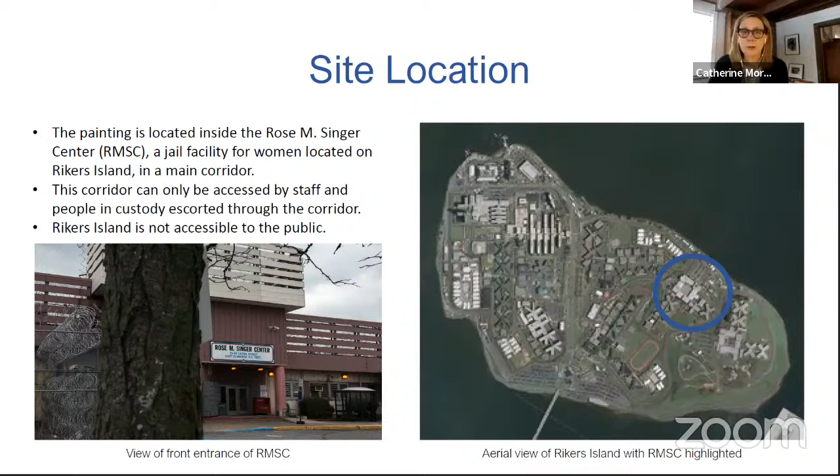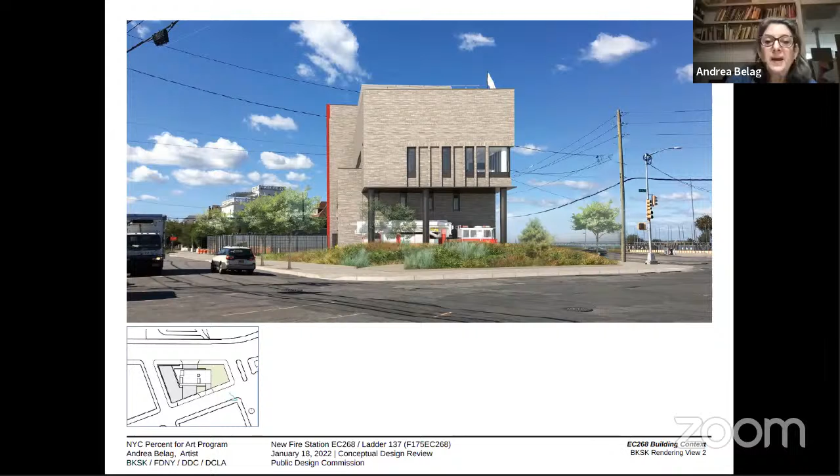This is the new fantastic fire station that will be built, on the side of 116th Street. And the landscaped area is where the artwork will be positioned. Sorry, I'm a little clunky with this. I'm going to show you some work that was completed in my studio during this process.

Like many New Yorkers, Far Rockaway was my introduction to the ocean and beach as a child. When I returned as an adult in 2015, I was struck by the exquisite light, which gave me a feeling of well-being. Little did I know I was on the same street where I had spent time long ago. The attraction was so strong that I ended up moving into one of the original bungalows on Beach 25th Street, and it is now my part-time residence and the inspiration for my work.

The painting in Waves is inspired by my walks on the beach in Far Rockaway. I use color, light, and the illusion of space and movement to interpret the movement of water. The ocean is a compelling feature in Far Rockaway, a community by the sea. Additionally, I want to include images of some of the history and community life on the peninsula. Therefore, I have merged black and white photographs into the painting.

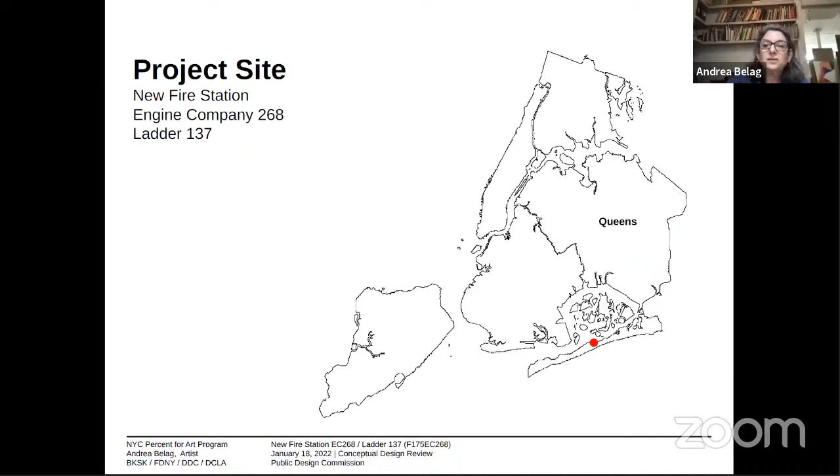Project site is halfway on the peninsula. I'm trying to make this smaller, it's not working. Okay, the project site is halfway on the peninsula. I just did something bad. There we go. This is the site, and it divides the retail and commercial area from the residential neighborhood.

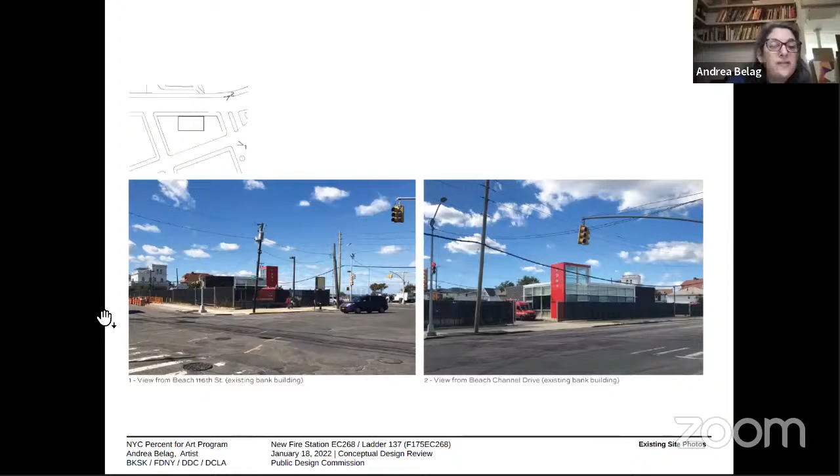And it is in line with the 9/11 Tribute Park. This was the original fire station that was damaged in Sandy. This is the existing site, Beach Channel Drive, 116th Street, and I think it's being used as a teaching facility for the fire department.

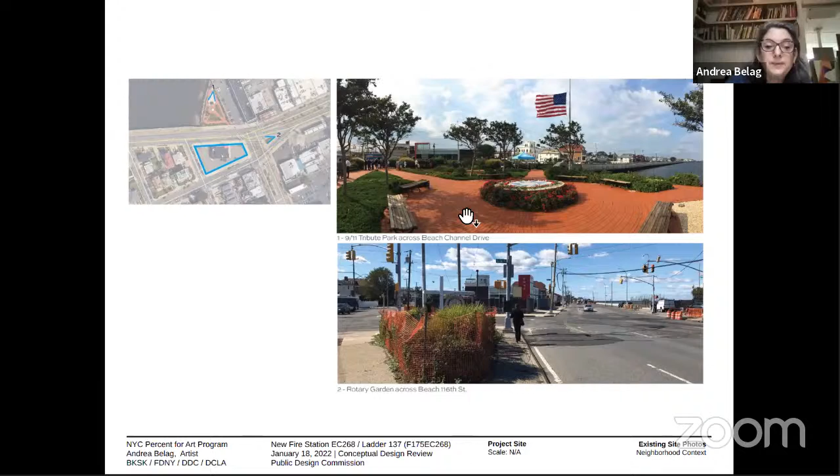And you can see the site for the fire station, the Rotary Garden, and 9/11 tribute lined up. Again, here is the artwork location. It's in the southeast corner lot of the new fire station.

I've taken an oil painting completed in my studio and augmented the dimensions in Photoshop. In select areas, I've blended black and white photographs into the painting.

Early photograph of the Far Rockaway Boardwalk, quahog clamshells that were used by native population, fishing in Jamaica Bay, NASA photograph of Superstorm Sandy, local street flooding, Black Surfers Association paddle out honoring George Floyd, and finally the badge of Engine Company 268, Ladder Company 137. First, the glass will be digitally printed with the photos.

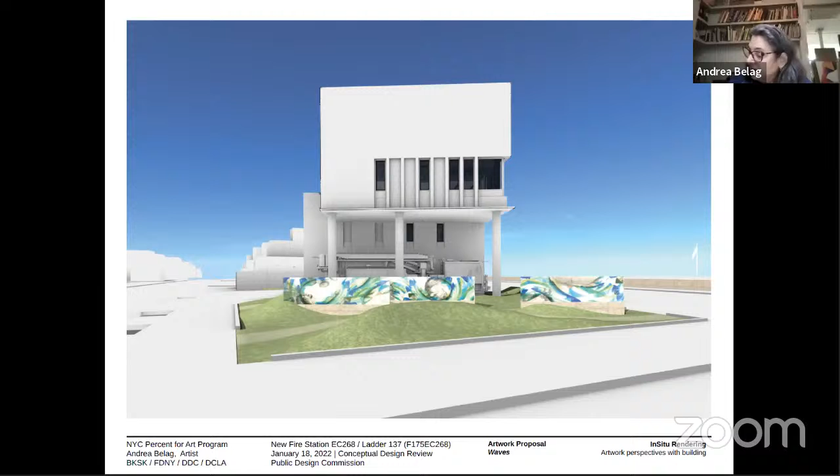Viridian, permanent green, ultramarine blue, manganese blue, cerulean blue, iridescent bronze, gamboge, dianthus pink, and titanium white are the source colors. I hope the artwork will enhance the presence of the fire department, the fire station, EC 268, and Ladder Company 137 as a place of civic importance.

These are the details. The first panel in glass measures approximately 4 feet high and 16 feet long, with a legend in Garamond Regular Pro, and the bottom of it will be 18 inches from the bottom of the glass. The first image is a 1903 photograph of Far Rockaway's boardwalk, which is the 2nd largest in the country. And here you have clamshells, which Native Americans came from different areas, as well as the local population, and used

as a major source of food. And then taken these beautiful shells, which have a purple indentation, and carved them into beads and small objects.

This is the second panel. These are fishers in Jamaica Bay. This is the Gil Hodges Memorial Bridge, which was built in 1937 and connects Far Rockaway to the mainland, Brooklyn, and beyond. And this is Superstorm Sandy, from a NASA photograph.

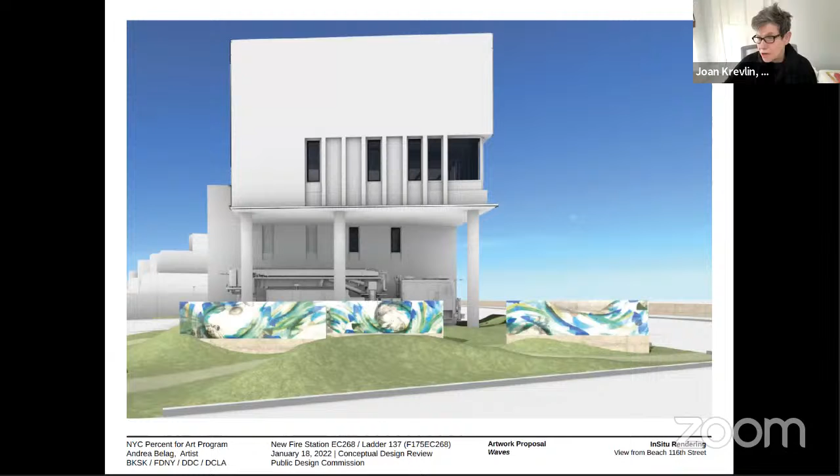And the seating are low pebble benches. They were in the architectural presentation, but they sit close to the ground and are kind of flat, pebble-shaped pieces. They don't have a lot of articulation to them, and they don't have backs or much line to them, which I think will make them not distracting in any way, but part of the reading of the landscape.

I'm going to chime in here. Deborah, did you want to say? Go ahead, Signe, I can follow you. Okay, well Joan, I think you mentioned this right off the bat, but the choice of plant material right now and the intent, as I hear it described, are completely not in sync. The plant material that is on the palette right now gets to be at least 30 inches, if not taller.

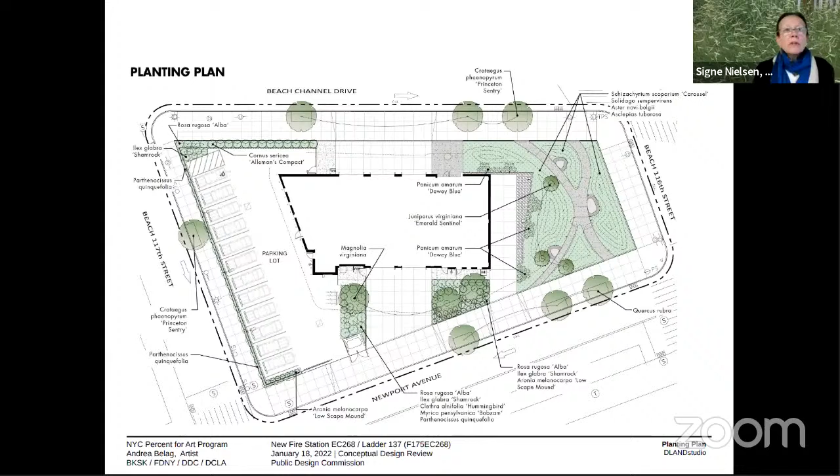And so that has to get reconceived. But I'm worried that if it remains a palette that recalls the dunes, these grasses will have to get cut down every year. And as such, the presence of the base and the relationship of the base to the piece is going to change over the course of the year. And I think that needs to be thought through.

I just have to say that it's somewhat gratuitous to say that the benches are placed in the shade of trees when those two conifers are about as skinny as you can get. So if you do really want shade, those should not be junipers.

And then the only other thing I'd say is, Manuel stated this at the beginning, is that the text—albeit I think a general question about whether this level of didactic intervention is appropriate—it is only 2 feet off the ground. It seems incredibly small, and it's not that close to the path. So I'm not really sure, not to mention the fact that under the current plant palette, it'll be totally obscured by August. If you look at panel 2, there's no way somebody on the path could read that.

I appreciate that panel 1, the text, if it is the way I understand it, is on the right side of the east-facing panels. Then you could probably read it on 1 and 3, but you definitely can't read it on 2, especially if the font is the size it is. So I really think that has to get rethought, and the planting.

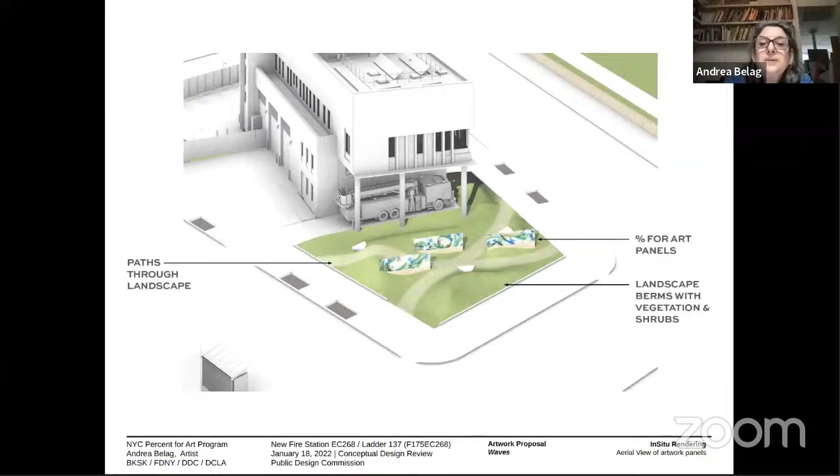Joan, do you want to talk to them? Sure. Yeah, we did a whole series of studies with Andrea and DLANDstudio about how to site them. In part because the piece started as a single piece, we thought that the fact that they are running all parallel to each other, that they have a relationship to the geometry of the building, and can be read almost sequentially as you move through it—in the series of studies we did, this was the one we felt was strongest.

The paths weren't there first—the idea of the paths were there. We then worked with Andrea to site the pieces and then worked the paths back through them so that they had good visibility and you could see them from different perspectives as you moved through it. So it was trying to both be responsive to the building geometry, to the movement through that site, and to be able to read them both individually.

And if you're on the sidewalk, you kind of see them as a collection of pieces that could almost be reassembled in a way. I think curving it would make it even more complicated relative to the building, and also probably prohibitively costly. I think it would be an interesting exercise if we had lots of budget, which I know Andrea is really hard up against.

We also spent a lot of time looking at the proportion of them with Andrea, and wanted to have them read relatively horizontally. So the 4 foot by 16 foot height kind of gave a sense of movement as you move through it, and they felt kind of linear as opposed to too tall and like stoppages in a way—they felt too static when they were taller.

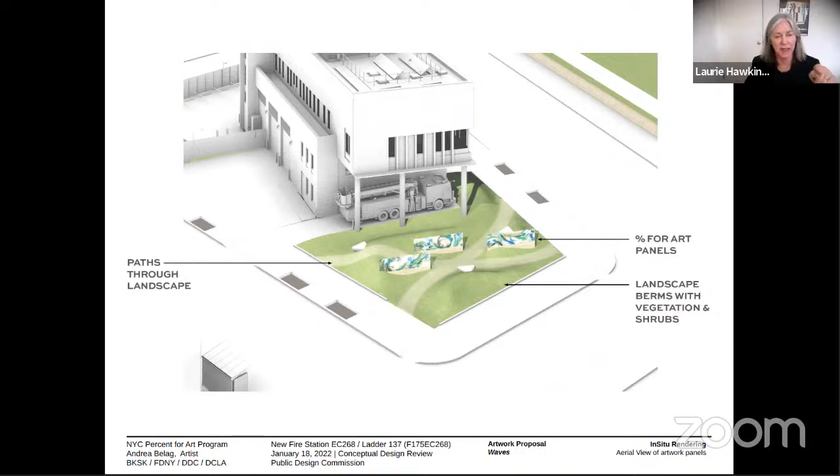So we did quite a lot of study about proportion and how you come upon them as you move through the site. We could certainly continue to study those paths—I don't think they have to be fixed in stone yet. So maybe you get closer to the first one as you're coming in the front, but the idea is that you weave through them and engage with and encounter them. I had just one follow-up question, which was when I was looking at the section—if we could go back to that.

The section looks, where is the concrete in this section? Andrea, go to the last page, because this is an earlier study about height, and this is more of a structural drawing right here. So this is a more accurate representation, and we're looking to see whether we can taper the concrete towards the top so it's not quite a shelf. So if you see on the right, the glass panels will sit in the concrete almost like a glass railing in a shoe.

We did a series of studies that had a metal frame around them. We're trying to keep metal off the site as much as we can. We certainly didn't want to frame the artwork. And so this as a strategy feels like the most inobtrusive strategy, but I don't think we have sized or proportioned that footing correctly yet.

I think from my perspective, it's too chunky at the top. And I'm hoping that we can taper it so that as it reaches the panel, it just doesn't have such a hard edge. And we're looking at that right now with our structural engineers.

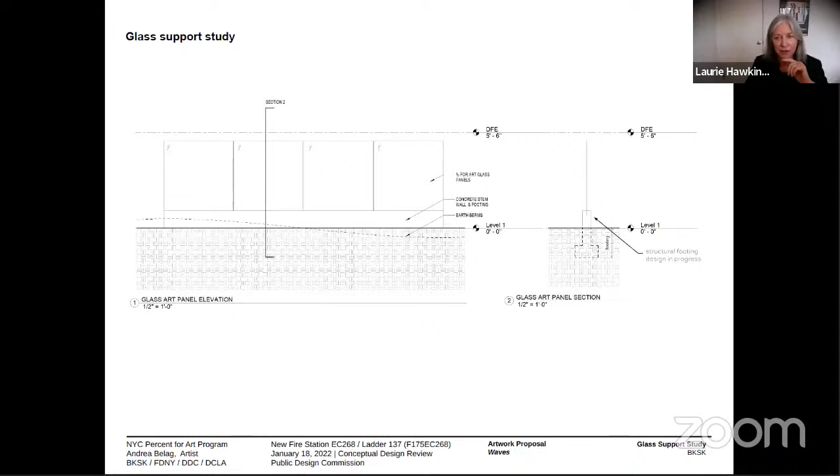And so you'll see that at our next presentation. You're going to be looking at, you won't be looking at architectural concrete. This is a footing, so that's just something else, I know you know that. Yes, but we can control the color to a certain extent, which we've done before. It is architecture, it is a footing, but we can kind of have a certain amount of control in terms of the quality of it and how we do it.

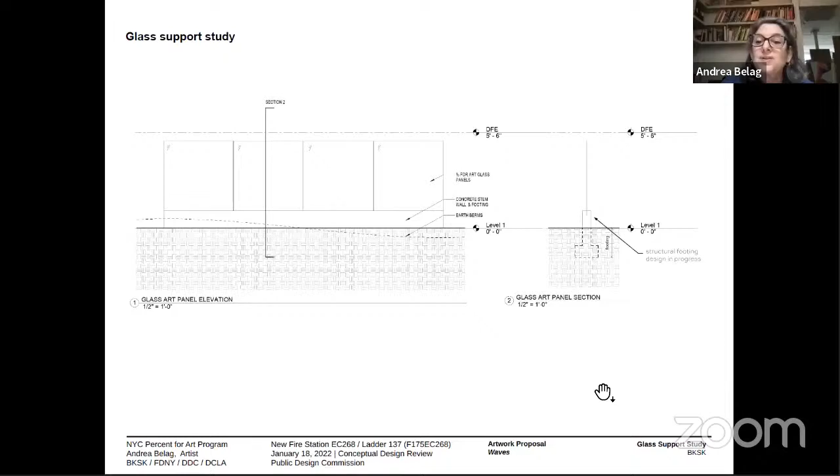And then the reason, one final question, the reason for the three pieces being all the same length? That was my choice. It's not to prioritize, it was sort of a timeline in the way I conceived it. The first panel being the earliest history of Native Americans, and then the beginning of the boardwalk, and then the third one being Superstorm Sandy.

I don't know who's doing what over here. I don't have the controls anymore.

And more towards contemporary events, like the Black Surfers Association. So it was vaguely a timeline, and it just seemed to make sense to me.

Andrea, I'm controlling. Is there a specific slide you want to go to? No, I was just answering. I'm very happy for you to take control.

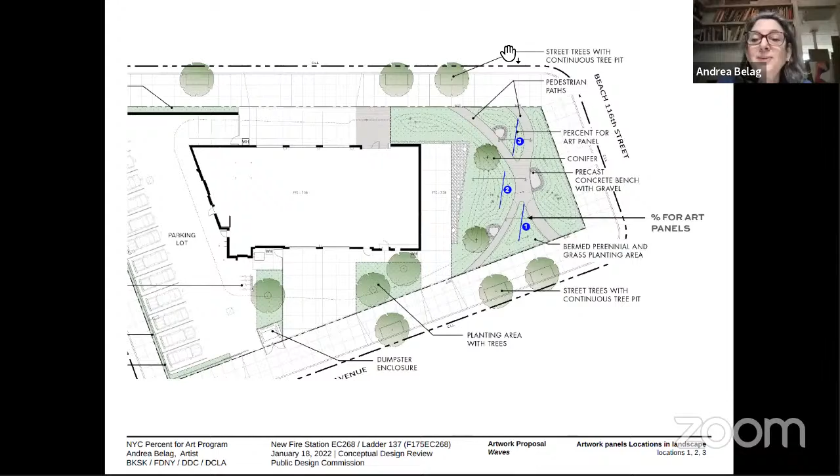And there's only one other thing, and I have to defer to Keri on this, but at today's meeting, unfortunately, we are missing our two artists members, and I know that really the conversation that comes out of today will help guide you in the next month before you come back for a conceptual vote. And so I wonder, Keri, is there a way that we can get input from our artist members before this is sort of finalized?

So we did informally review the project with Kenseth Armstead, Commissioner Armstead, and the response we got from Kenseth was whether or not the artists had considered increasing the height of the glass panels to 8 foot so that the artwork is more immersive.

I do not think we showed this with Mary, but we can definitely seek a little more feedback for the team before they move forward too far.

I can answer that it would just be way too unwieldy and somewhat dangerous to have something 8 feet, especially if we're going to have it as a horizontal. It just, it would look fabulous, but it's just not possible.

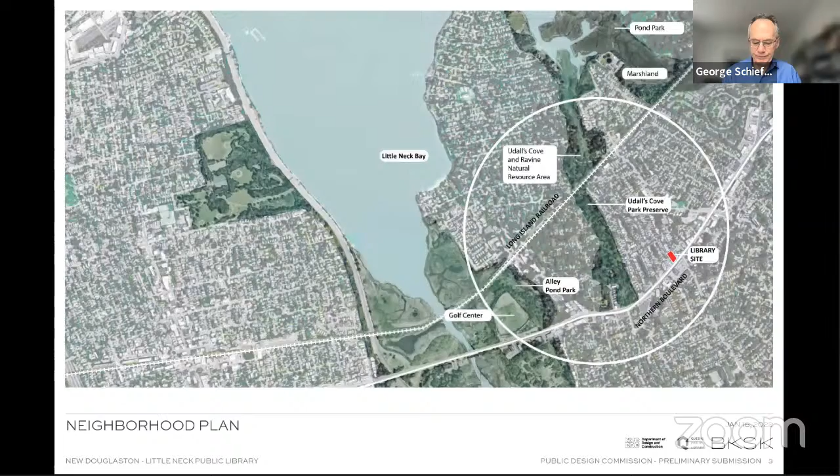So that juxtaposition of Northern Boulevard up against these fingers of greenery is one of the first major themes for our design. In the local context, we're surrounded by kind of strip urbanism, parking lots on a lot of these corners. 249th Street, on the left side of your screen, is a residential street. Northern Boulevard is the very busy thoroughfare I've talked about. What we've tried to do is create a very prominent, obvious, and dynamic presence on this corner.

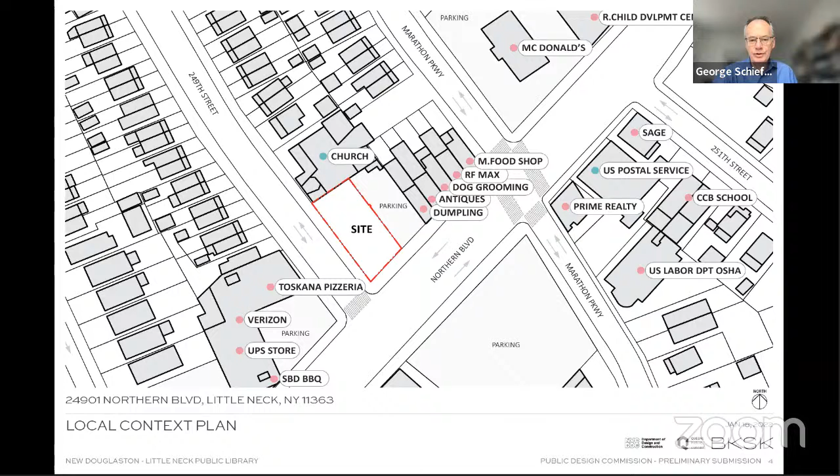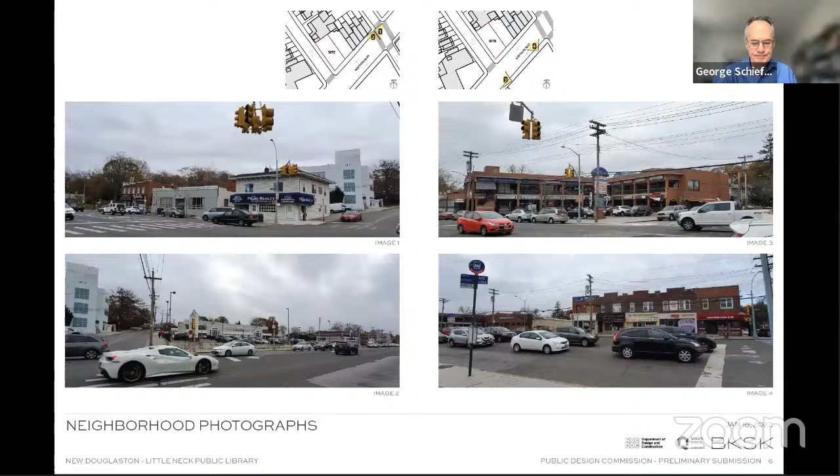The other corners around the site have this kind of strip urbanism I've been talking about, fairly nondescript. The neighborhood extending to the west, on the top left slide, is quiet, residential, tree-lined, very lovely for the most part. A church is our neighbor directly to the west.

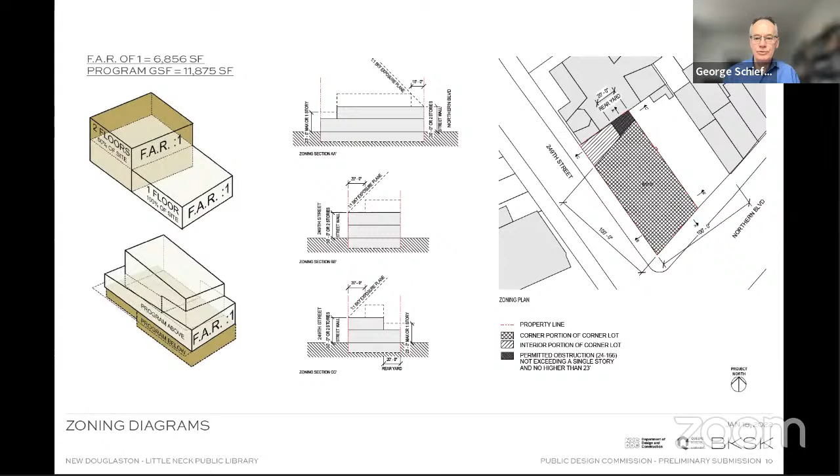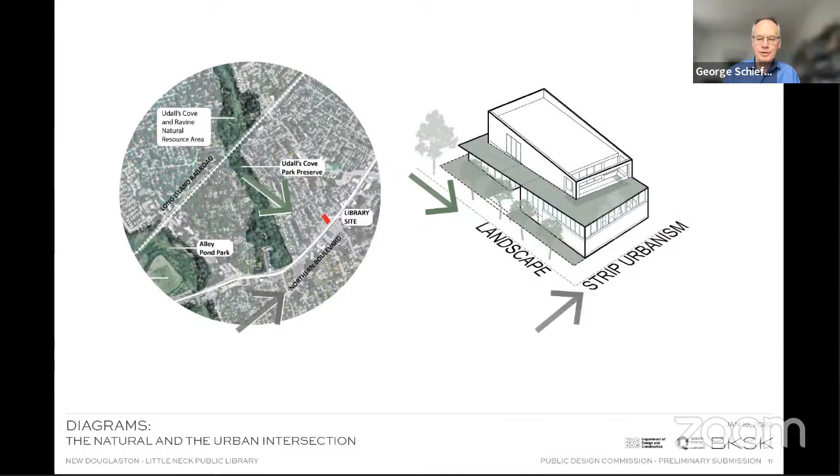So again, that primary idea of bringing greenery to the site juxtaposed to the strip urbanism takes the form of a landscape forecourt, a prominent green roof, and then a garden off of the children's area at the top right of the massing that you see.

So we have a series of slides here where we've done what we showed you previously, and then what we're proposing now. I'm going to skip right to what we're proposing now in each case.

As we look at the site, a thing to keep in mind is that straight up the page is project north. Actual north is about 45 degrees off to the left, so the angled facades on the corner of Northern Boulevard and 249th Street are facing southwest and southeast, and they'll get prominent sun. So a lot of our strategy for the facade on that level is about shading.

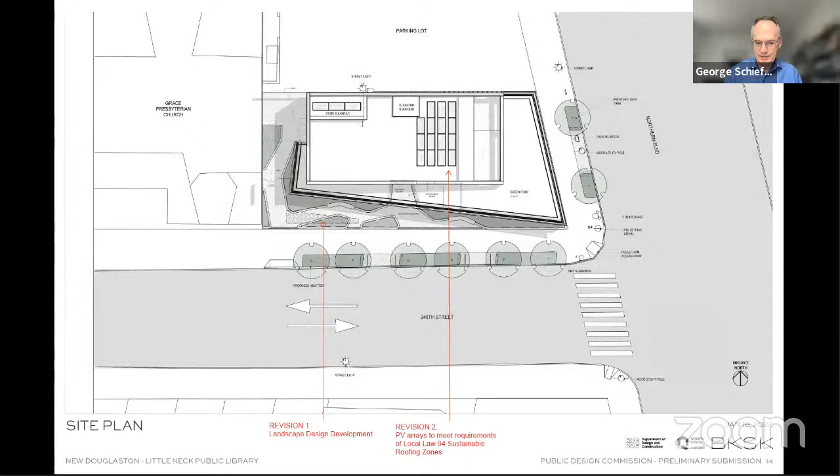On the left-hand side, to the west of our building, is a maintenance area with gated access.

The cellar plan, or lower level plan as I prefer to call it, has as its most important thing to remember: teens and the multi-purpose space have the two light wells that are visible on the exterior and experienced by the library goer as he enters the library. They are shaded in light blue.

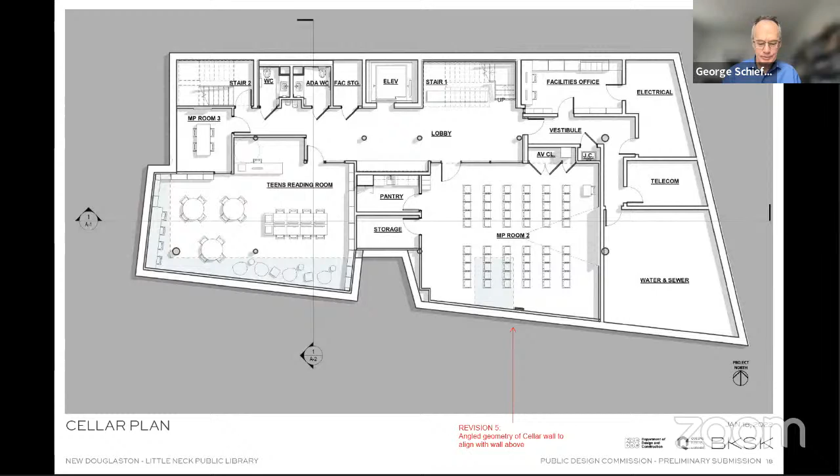The second floor children's area, the children's reading room, occupies the whole second floor and is primarily open with a continuous glass wall to the east, and has its own private garden. It looks out onto that garden, and then beyond that out onto the sloping green roof of the lower wedge. That green roof is also experienced from the windows into the children's area at various strategically placed locations.

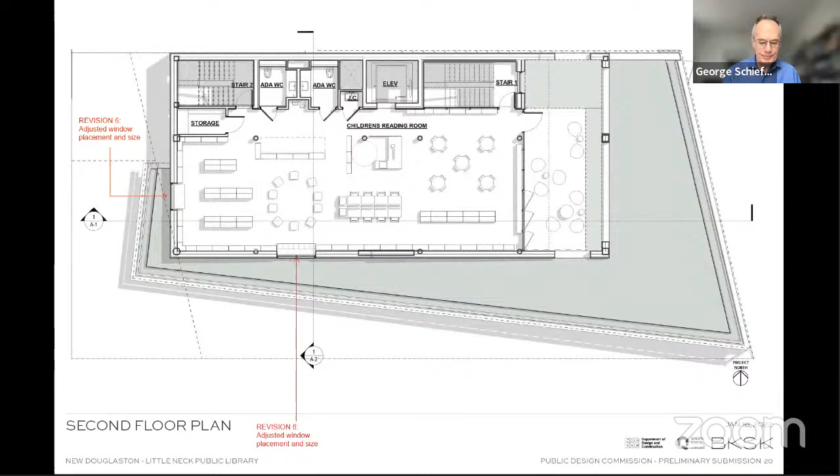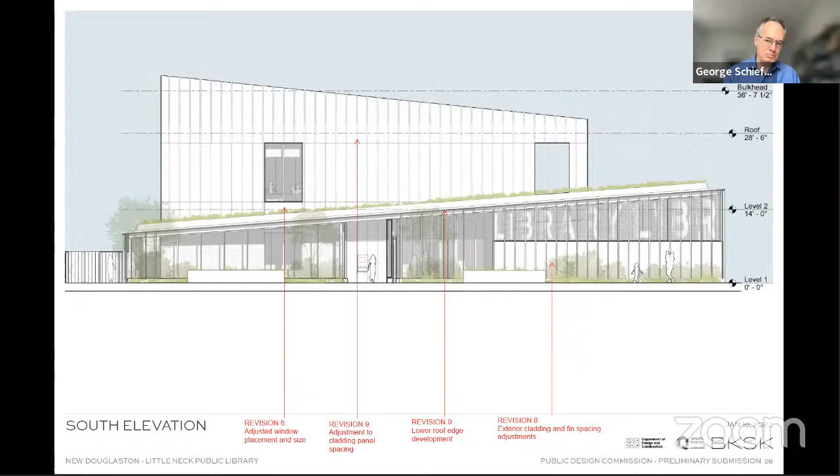The lower wedge is characterized by fairly deep fins and a flat rain screen panel system. The fins are anywhere from 4 to 12 inches, depending on whether they're over the glass or over the surface of the panel. It's also characterized by the big graphic, a fritted pattern slash super graphic that helps with shading and creates a presence on Northern Boulevard. The top wedge is flat rain screen panels with a reveal, morphing into an opening. Those reveals become openings at the parapet level so the building starts to dematerialize a bit at the top.

Again, from the Northern Boulevard side, you see the deep fins on the elevation and the super graphic facing out onto Northern Boulevard, and above that the children's garden in a sheltered and shaded space.

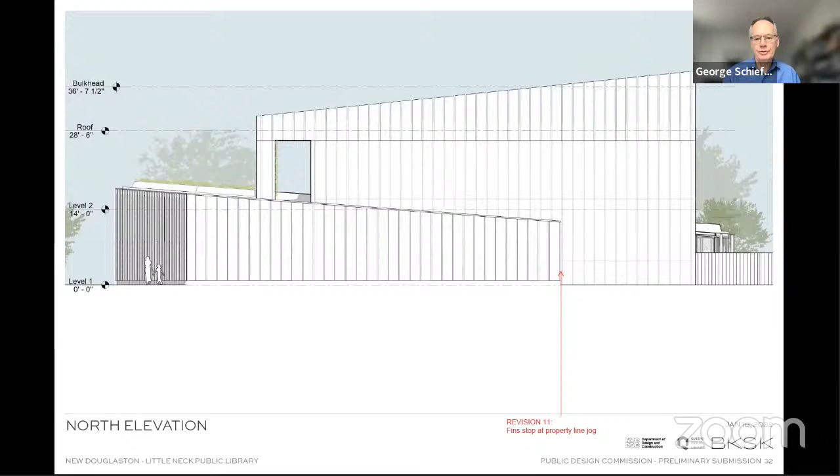We're blessed by a slight jog in the property line, so we can continue our deeper fins around to the backside and contrast them to the flat panel expression of the upper wedge coming down to the ground on this face.

As one walks down from 249th Street from the residential area, one ought to experience the extent of the green roof extending up on the side of the building. You can see the glass transparent expression at the first floor and the more solid expression of the upper floor.

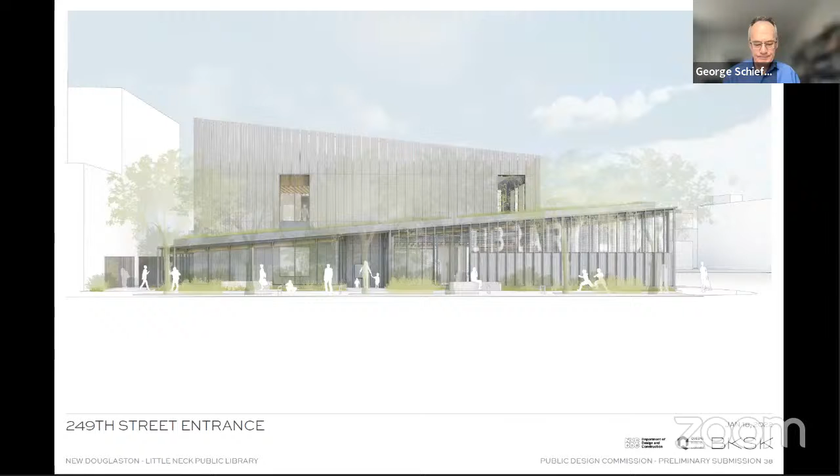View of our building from the residential street, looking back at those light wells, the light well down to teens on the left with artwork in it, not shown in this image.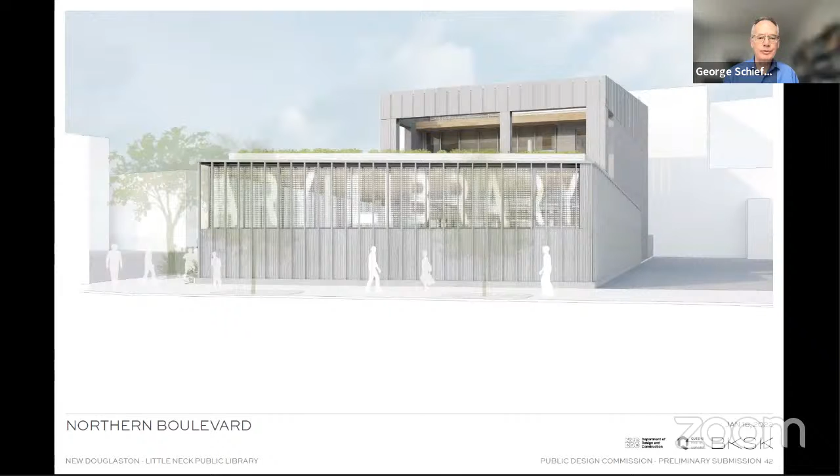And the expression on Northern Boulevard with a large graphic. You can also see very clearly here the wood ceiling emerging out onto the children's garden at the top of the building.

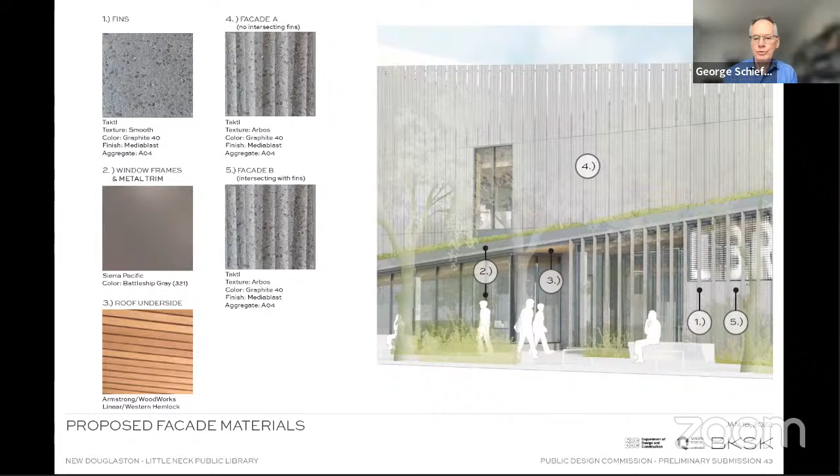Our materials are UHPC, ultra high performance concrete, glass fiber reinforced concrete as a panel, rain screen panel system. In order to be able to use and bid multiple vendors, we rely more on the patterning, spacing of those panels rather than the actual surface texture. We'd like to do both, surface texture and spacing, fins, reveals, and openings between the panels, as well as surface texture. It depends on the actual material vendor we're able to use as to how much surface texture we can get. On the bottom left, the wood I was talking about, within the neutral gray container, provides a kind of counterpoint.

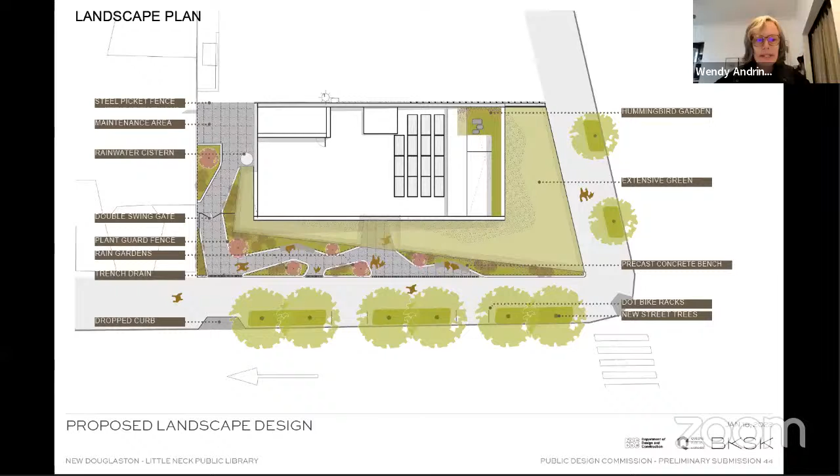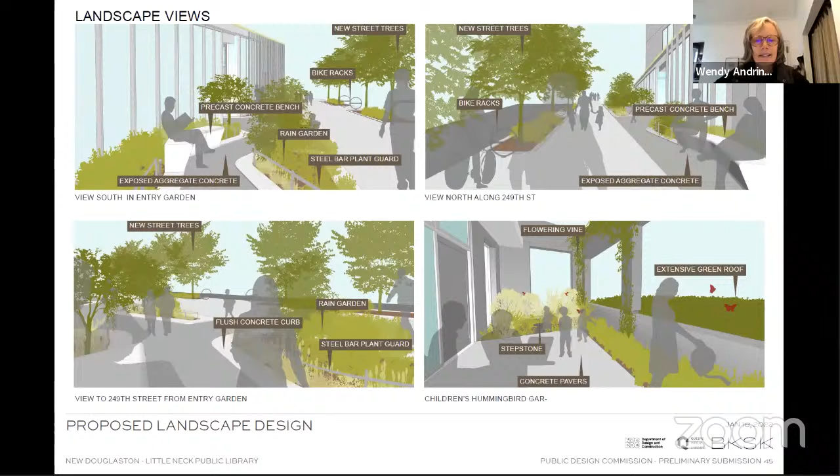And at the bottom right, the views of the children's terrace with the hummingbird garden surrounding it, the climbing vines, and the green roof beyond the parapet. Next slide, please.

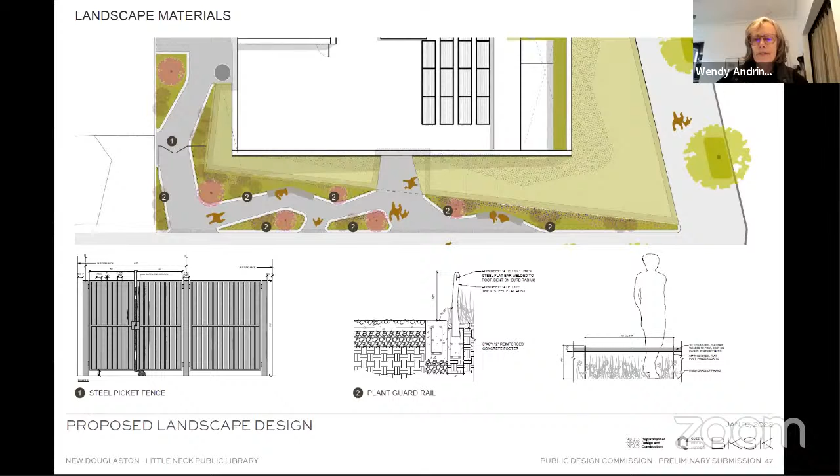There's a fence enclosing the maintenance area and a plant guardrail surrounding the plant beds. The six-foot steel fence matches the color and finish of the architecture, and the 18-inch plant guardrail is made of steel bar that can be bent to the curves of the plant beds. Next slide, please.

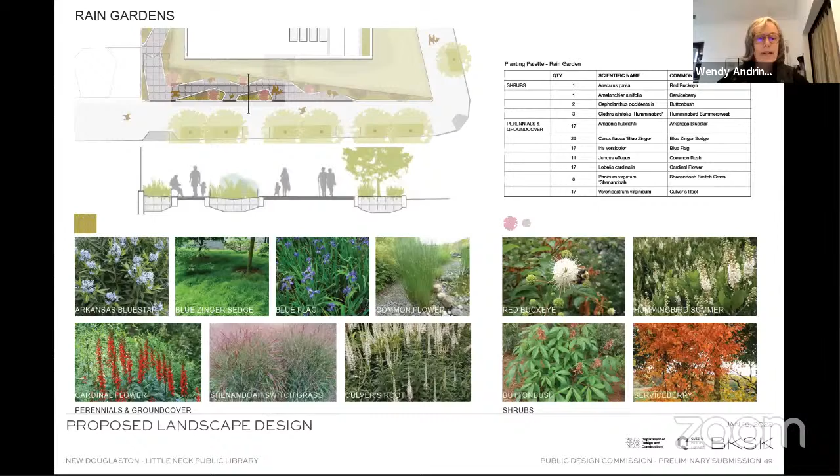The rain gardens, highlighted above in the key plan, use a similar palette to the rest of the planters for continuity, with the addition of grasses and perennials that like wet soils. Next slide, please.

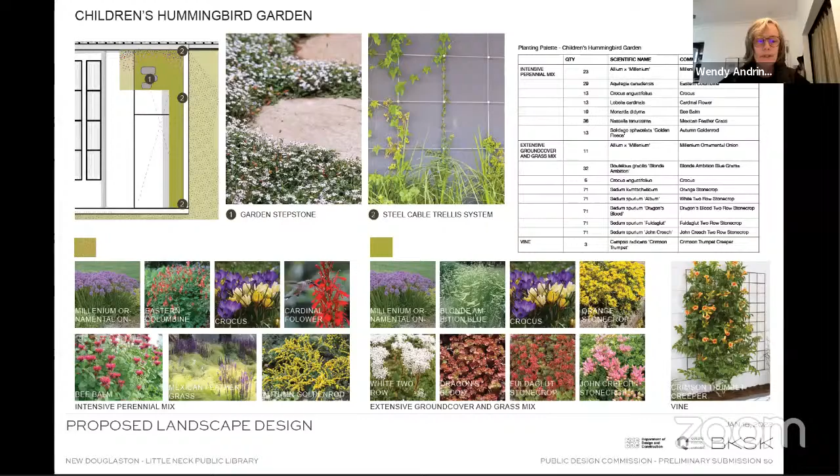On the second floor, the children's hummingbird garden palette at the bottom left is proposed for the area around the garden stepstone, marked number 1 on the plan. These are selected for their hummingbird qualities, habitat qualities, and texture, and the character will be shown as in the feather grass image, with soft textured grass interplanted with perennials. There are stepstones here to invite children into the center of the garden because we want them to touch and interact with the plants. The palette at the bottom right is a ground cover and grass mix for the linear planter, where the trellis is marked number 2, and here the sedum is interplanted with grass mix. We've proposed native trumpet vine for the trellis and spring ephemerals throughout this garden for early spring interest.

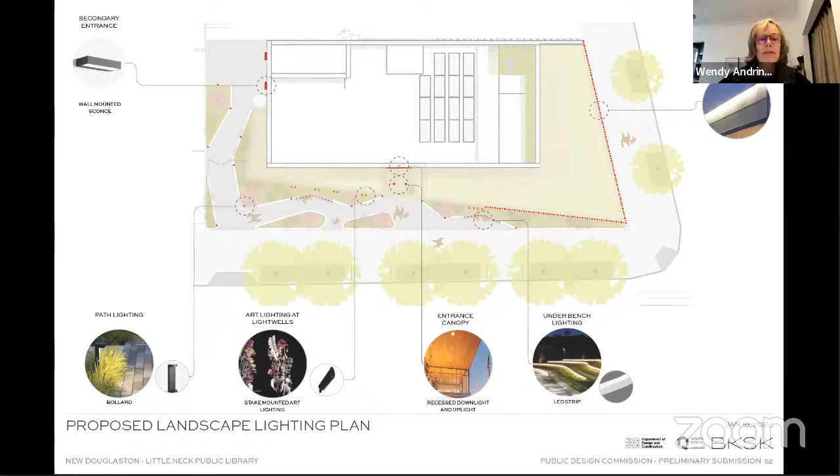The entry vestibule is lit with recessed downlights and an uplight. The artwork, which is seen through the windows into the light wells, is lit from outside with uplights in the planters.

There's lighting integrated with the library signage and wall-mounted lighting at the secondary entrances. At the second level, there's lighting beneath the canopy that overhangs part of the children's terrace, and an accent strip light in the parapet to highlight the planters.

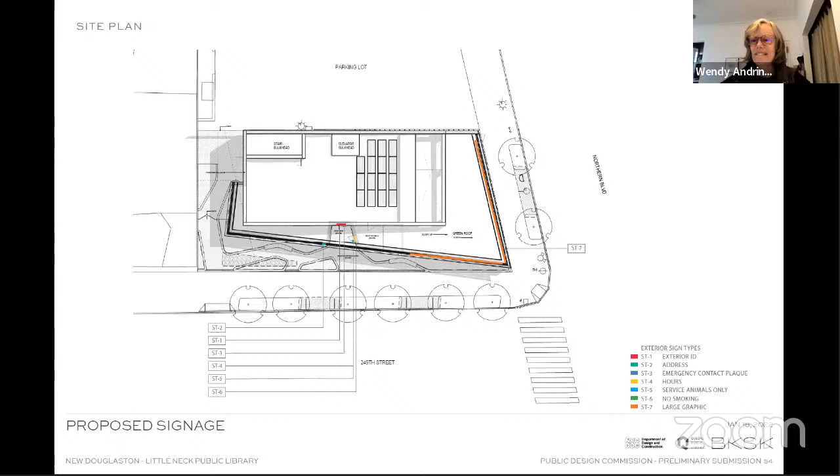George, are you able to unmute yet? There we go, finally. I've been hitting the mute button for a while.

What we're showing here on the right-hand side at the elevation facing Northern Boulevard and 249th Street at the corner is an orange graphic indicating that we hope to be able to light the large graphic in a very subtle way with a kind of hidden light source. It depends a little on zoning interpretation and what we'll be allowed to do.

What the large graphic we hope will make clear is that the announcement of the library will be on a large scale, and the signage required to indicate the presence of the library can be a little more discreet, having a sort of happy home in the recess outside the vestibule.

Signage right at the entrance as the library goer comes into the landscape plaza and directly faces into the building.

The super graphic, as I've indicated, announces the presence of the library in a kind of car-centric environment.

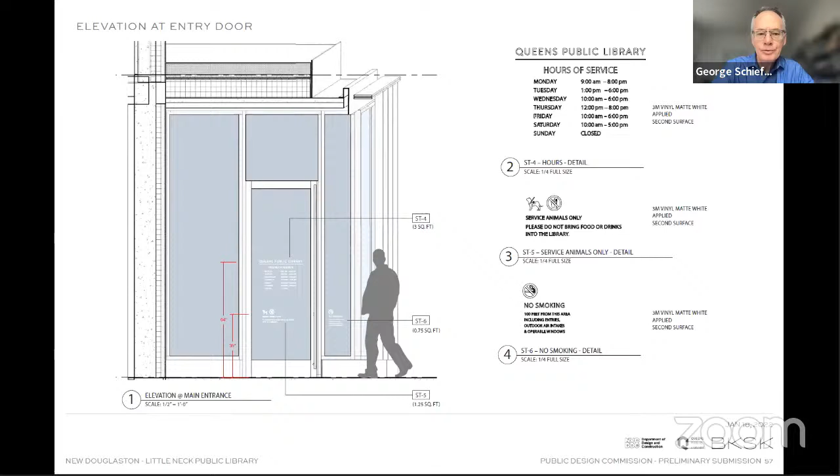And then the signage right at the entry doorway, all the required signage and sizes, to be very visible for the library goer as they come into the building.

Font, size, and scale of each of the items for the signage.

I'm hoping Misha's on at this point because this is his turn. I hope we made clear where Misha's artwork was, to the left and right of the entrance in the two light wells that extend down to the teens and multi-purpose space. Go ahead, Misha.

All right, well, thanks so much. My name's Misha Kahn. I'm an artist and designer. I live and work in Brooklyn. Sarah, if you want to just sort of breeze through some past work.

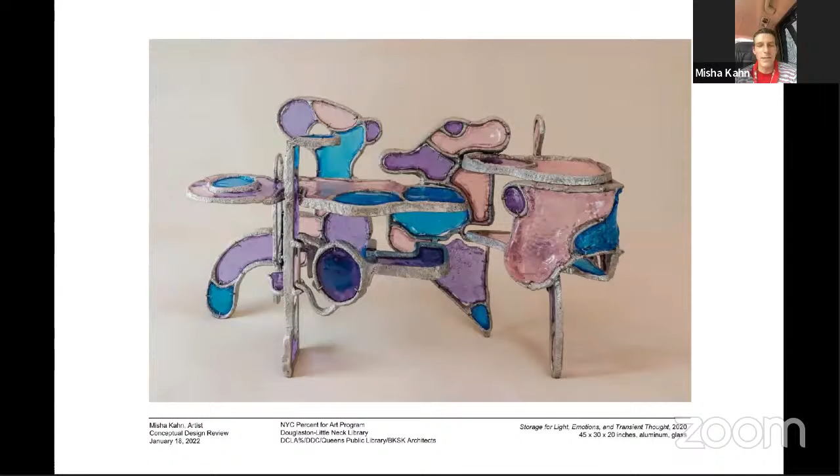A lot of my artwork uses digital fabrication as well as really classic craft techniques, melding these two processes, mostly in an abstract, informal way, but with some lucid, maybe surrealist elements woven in, using a lot of different materials. You're seeing some weaving and pieces in plastic and metal, mixed media and casting. I wanted to bring a lot of this different spirit into this project.

There's all the history and literature that's accumulated over time, research books, but also posters and teen periodicals, all these disparate elements. I was thinking about how to fuse all of those with what the library is doing, which is organizing all of those elements, and putting them together with this really logical structure. So the library is forming this lattice work of logic that is holding these pieces.

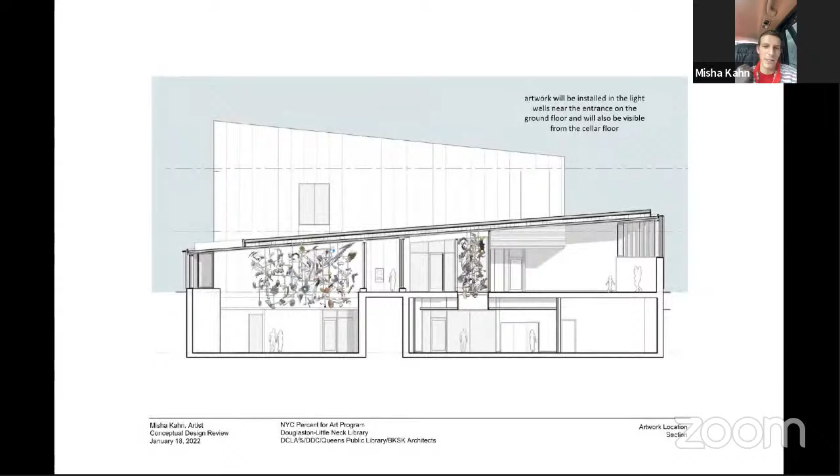The one on the right side forms a more vertical column. As you enter the building, you can walk around all sides of this one—that's the box on the right. This one's more of a 360 feel, and the forms are more helical and swimming.

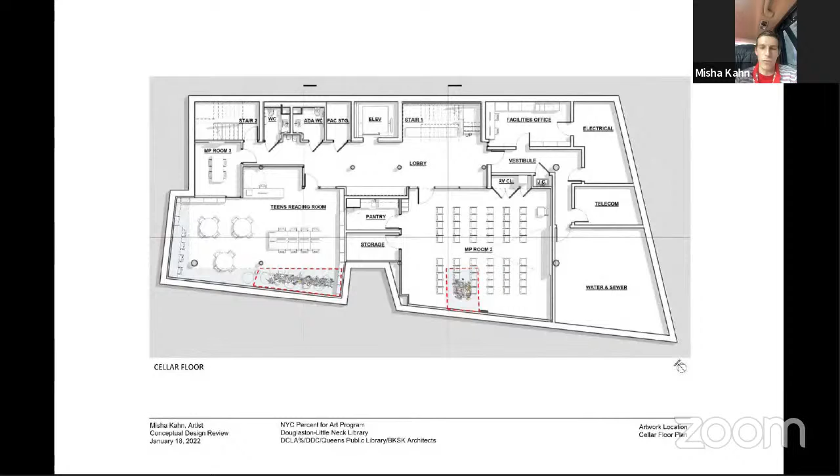Both works extend slightly down into the downstairs space, stopping at around 9 feet. From downstairs, you get the light bouncing through the shapes and see the bottom part of the works extending into the teen area, as well as the area on the right. I think this is a nice way to feel like the work is moving through the whole building.

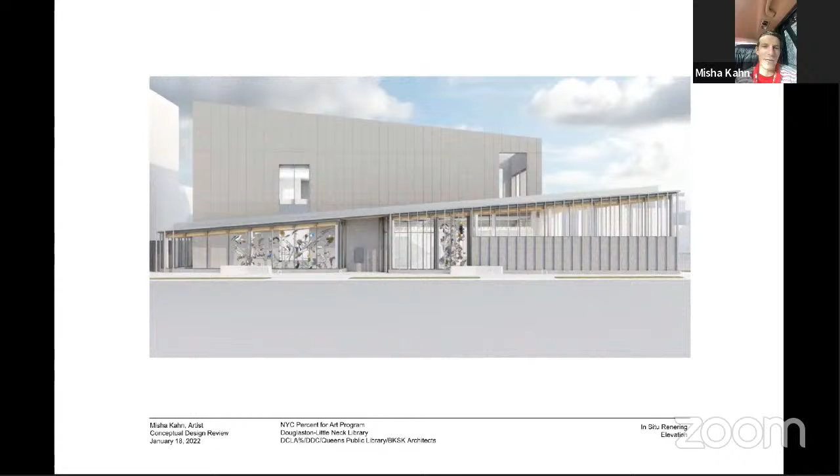Here's a closer rendering of the two pieces, and you can see the way the one on the left is this floating facade, and the one on the right is more tangled and three-dimensional.

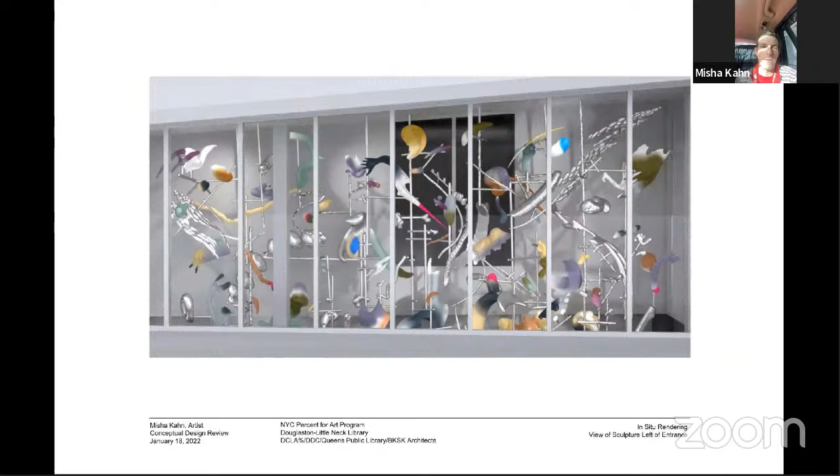Again, this is the one on the left, so you can get a closer look at some of the elements and see the way the forms are playing. What I hope is that this is a visual that people coming to the library can keep discovering new elements every time they return. We've talked about ways this could incorporate with programming—maybe a map, physical or digital, that could direct kids to different points of inspiration or places in the neighborhood or library that these forms reference and come from.

The material I propose using is building the lattice work out of stainless steel. The 3D printed components, made of PLA, would be covered with UV automotive paint so they have a really glossy finish that does well in the sunlight. Then the rigid structure from the stainless steel elements makes those pieces attachable.

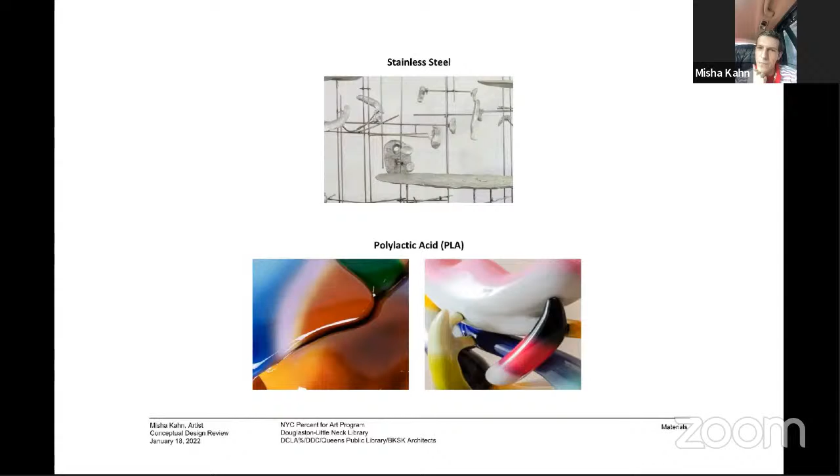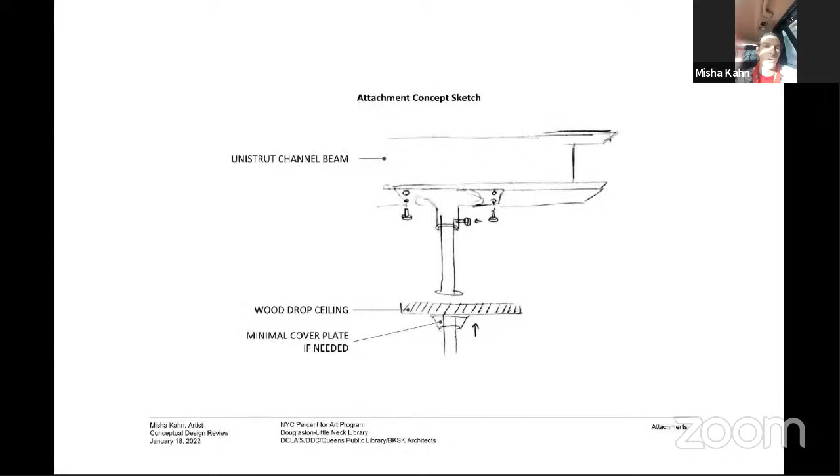A couple of attachment suggestions: go through the drop ceiling and mount some posts into the main beams, so you have a very minimal point where it comes through the wood ceiling detail in the two spaces.

There's obviously the maintenance concern of needing to get in and dust the pieces. They're fairly easy to clean, and we've talked about some ways to get into the space to make sure it's possible to maintain the work.

Thank you for that comprehensive, multidisciplinary presentation. I just hope that the landscape architect appreciates that my screensaver is Bouteloua.

Comments or questions from anyone? Laurie, you must have something. Very funny. Okay, so I guess, well, we have both the building and the artwork, right?

And the landscape, thank you. I'm going to defer to you, but I think the building is very elegant, and the massing, I think I stated before in my comments, beautifully designed. And I had that question about the light, which I thank you for responding to. I had one quick question just looking at the sections.

I'm sure you've thought of this, but the green roof, because you're opening up that double height space to the exterior in that 1.5-story room, George, slopes back. I was just thinking, if it was my situation, I was thinking drainage—drainage alert here. I'm not sure you've thought of that, but maybe you want to address that. And then I had, I don't know if Manuel's going to have—maybe I'll defer to him—any question about the library graphics for the moment?

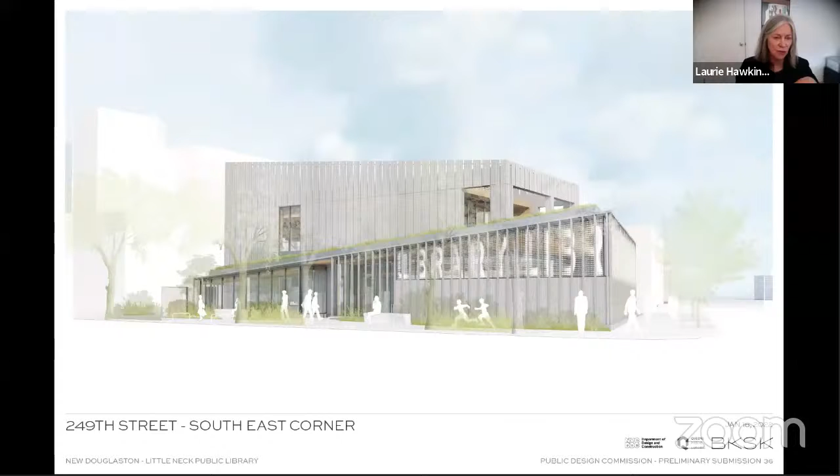One other quick question—I was wondering about the fins as you come into the front. What are those? What is that material? It's so long. Can you talk about that? Yeah, it's the same material as the siding. So everything is ultra high performance concrete.

Depending upon the characteristics of that material, it will either have a piece of steel that it sandwiches, or it can manage some of the spans by itself. There are different properties for, I think, the UHPC versus the GFRC. I was just wondering about the thickness of them, and if you have the steel, are you trying to continue that relationship to the fin on the building—maybe it's a very thin piece of steel? Yeah, we're looking to make it as thin as possible. We're somewhere down around 2 inches, I think, if we have to have a piece of steel sandwiched with GFRC.

Thank you. I have two comments on the graphic aspects. One, I'm not exactly sure what the Queens Public Library graphic system is, but I'm wondering if it's possible to consult with them, if there should be an inclusion—I know they have a logo, if that should be included in some way, whether on the door or on the side of the building, just to tie it to the larger system. They may have graphic guidelines around that, but that's one question I had.

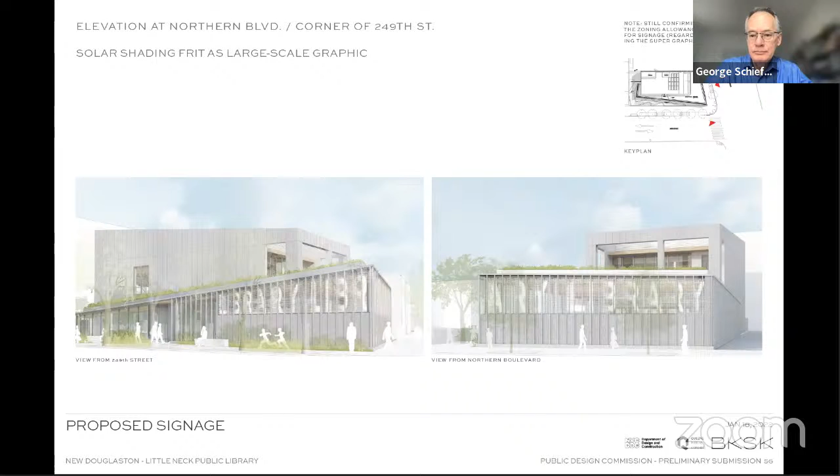And going around the corner is simply about making it a little bit more dynamic and a little bit more curious. Thanks.

Other commissioners care to weigh in? If not, I will chime in. Deborah, do I see you on mute?

Yeah, I was just wanting to commend the team on the integration of the architecture, the landscape, and the artwork. Misha touched on this in his presentation, that the artwork was thinking about the light in that space, in the entry, and it all comes together in an elegant way, and that's hard to do. So I just wanted to note that.

Thank you, I would agree. I think the artwork—I am not an artist, so take me at my thin knowledge here—is incredibly playful, and it makes me smile. I think it will attract people to enter, and the placement of it is really important. So I just wanted to say that.

I also want to commend the landscape team here, first of all for doing something I think is increasingly more important: looking at a site in the context of the larger ecological corridors and figuring out ways to restitch the fragments that have resulted from construction, roads, and all that stuff that breaks up habitat.

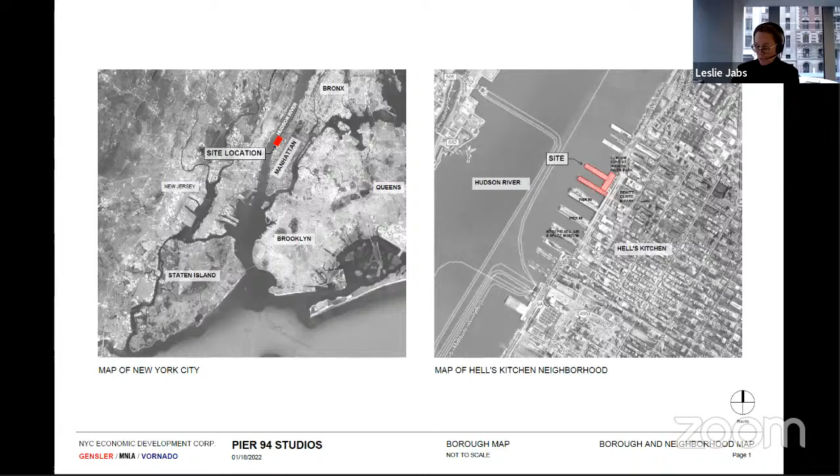So let me see if we can get this to go. I'm not going to present each slide—I think most of you are pretty familiar with the building and its location.

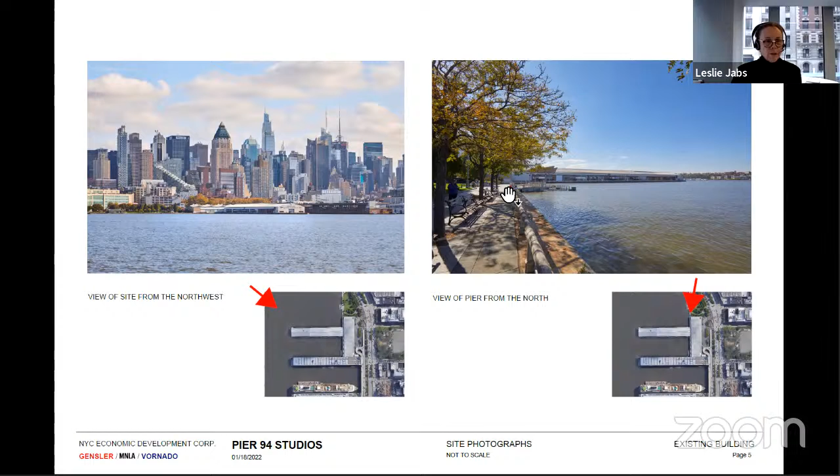So here I think as we look at this and think about the future development of Pier 97 and the view it will have of Pier 94 pier shed, that actually the pier shed is fairly prominent within the view. And we have this lovely esplanade coming down the river that right now just dead ends into the existing head house and pier shed. What you will see as part of the approvals is an extension of this promenade, which extends out onto the pier shed itself, terminating in public space at the end.

So one of the opportunities and things we really had to think about was how to embrace and celebrate some of these constraints coming from CPC. The next thing we had to deal with was the change of waterfront resiliency requirements and regulations, both from FEMA and New York City. As we continued to think about these things, it had a major impact to the project and to CPC and the approvals.

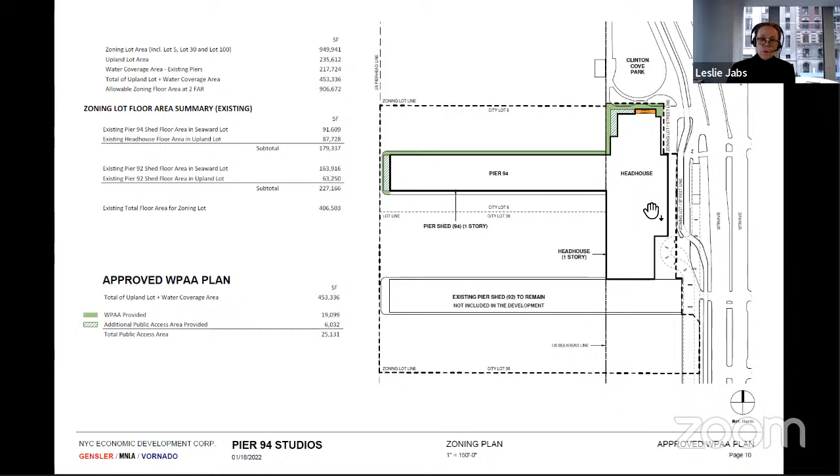So when we think about what has been there, this is the original approval. As you can see, as I showed you in the photo, this is the esplanade continuing and then coming out and around. We then had dedicated public space here at the north end of the site, public bathrooms, all kind of at the terminus of Clinton Cove Park.

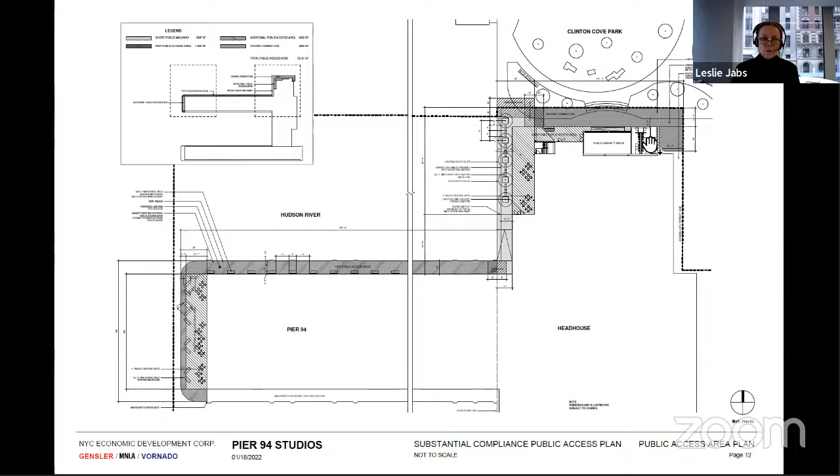In the revised version of this, what we have done is basically retain what was there in order to have CPC agree to the substantial compliance. The largest change, and Daniel, when he comes on for the landscape, will talk about landscape more, but in terms of the building and the building requirements, the floodplain requires us to elevate this portion of the building. So we had to do some modifications related to FEMA.

So what has changed and what is the requirement? FEMA has now put the entire waterfront into what they call the VE zone. The VE flood zone allows for tidal waves to wash over the pier, and it is required to be 2 feet above the base flood elevation, which in this case is +14. The new base plane for occupancy is +16 feet. Grade is at +8. So this means basically that we are 8 feet above the ground to have any occupancy out on the pier shed.

We also have the AE zone, which is for the terra firma part of the waterfront, at +11, which means that for occupancy we need to be at +12. So again, you're 4 feet above the general grade. And this was a big impact to the project.

So here, when we went in for the substantial compliance, what we looked at doing was to retain the height of the massing. This is the same approved 50-foot height, but we were allowed to say, okay, you have to be raised 8 feet. So you're adding the 8 feet in height, but not for occupied space. That was one of the things that came out of the substantial compliance.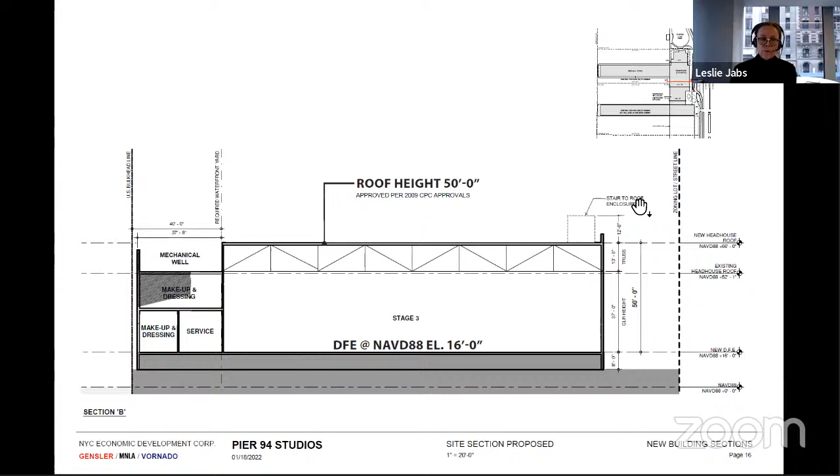So as we look through this again, here we get to the plan. Basically this plan is showing you 8 feet above grade. So while we could call it the first floor, it is not at grade. What we have here are sound stages. We have 6 stages, of which 5 occur in the head house. The head house is being fully rebuilt. The pier shed is being renovated. One of the challenges from the pier shed, and one of the next things we focused on as a driver, was the existing pier pile capacity.

So this portion of the pier only has concrete piles, which have a much greater load capacity and a greater ability to have weight put onto it. This part of the pier shed, existing building, has wood piles that have a much lower capacity for added weight. So programmatically, one of the things we needed to do was keep the occupancy and the kinds of weights added to the building tailored to work with the existing conditions.

So we have office use out here. We are using the existing building, but we're already adding the weight of an entire structural slab at +8 above the pier that has to be inserted, so that's already taking away from the existing capacity.

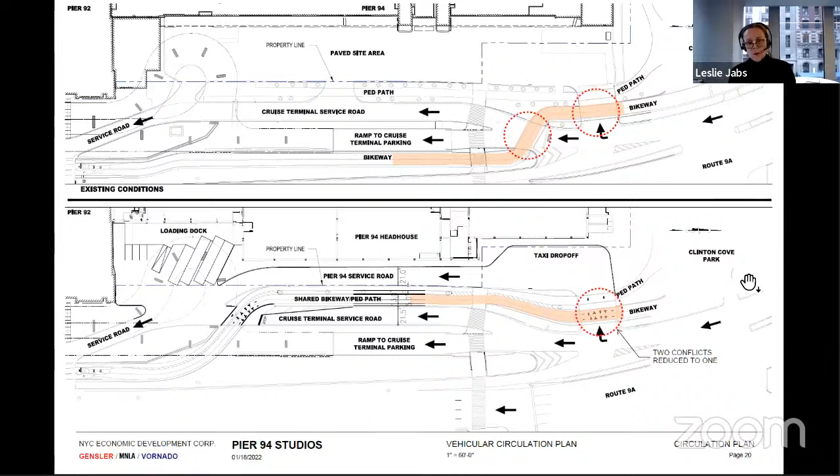So part of what's been agreed and retained is to actually reroute the bike path. As part of that, there'll be landscaping and a buffer zone between the bike path and the service road that is here. So that has been retained from the previous agreements.

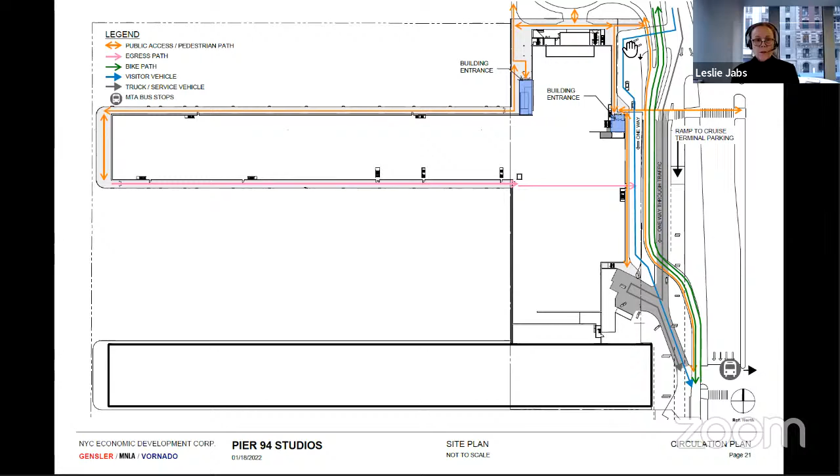We have some parking and arrival here at the entrance. Here on the actual pier shed itself, what's really great now is we will have 15-foot high windows that will line that pier shed coming out. So again, from Pier 97, you will see through this building. It will be active, well lit. Here you see how we have this interstitial floor that we're inserting into the existing structure.

And then the wall here that infills is required by FEMA to be breakaway. So when that wave action comes through, while the columns will remain, the infill actually has to wash away from it. It's sacrificed in order to make sure that the structure is not damaged.

Daniel now will talk about the landscape.

As you can see in this overall plan, on the east side we have a connection from Clinton Cove to the north, as well as from the east, from the pedestrian bike path, and the Esplanade continues down south to the pier. The materials for the Esplanade will be the same as what's shown existing in Hudson River Park, the same railing, tree and bench layout.

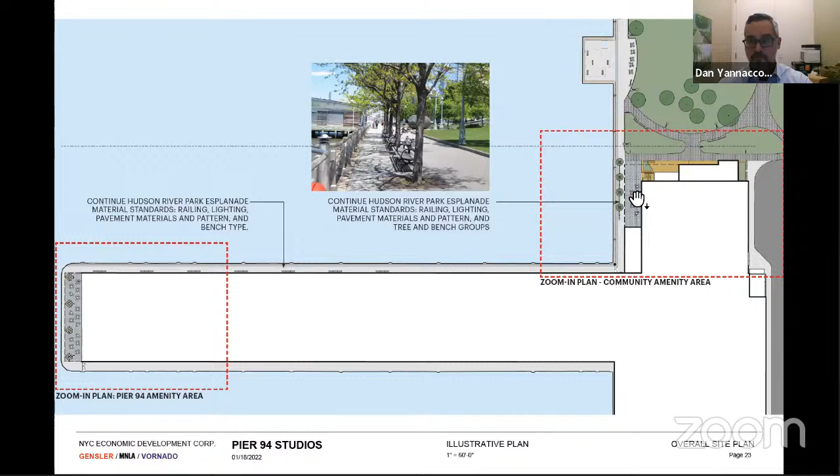Also within Clinton Cove is the hexagon paver, which will continue as well, leading from the bike path, so there's continuous materials. The enlargement shows from the east, the planter with benches will greet you at where the restroom facilities are, with the indoor amenity space. An accessible ramp leads you up to the platform for the public space, flanked by a planter as well. Heading west, there is a distinctive paving area which will signal additional seating opportunities for overlooking the water.

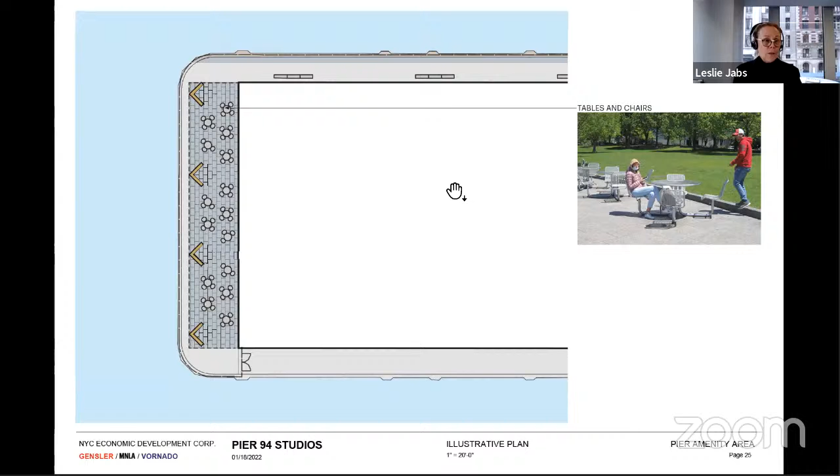Also to note here, as Leslie mentioned earlier, this end of the pier, the existing structure which has been renovated, has wood piles. We had explored placing trees on there, but the weight was too much for the piles to hold. I think the original approved scheme did not have trees as well, so part of substantial compliance was to stay with what had been approved previously.

So now getting into the renderings always helps us understand how things are. We have our view here from the northeast looking towards the southwest. As you can see on the pier shed, we have this long line of glazing that will allow a view through. There will be benches and other things that continue out with the Esplanade continuing out and around. We have the stages here.

There's signage for the stages. I'm sure we'll get to that a little bit later, it's easier to describe. And then we have this whole lovely dedicated community and public zone here where the park just lands into something that very clearly belongs to them.

As you can see here, upon arrival, we have landscaping that will screen this bike path, creating a nice kind of softness there. As Daniel was discussing, there's a planter with seating integrated. We've changed the materials here. We want to be sustainable, we want to celebrate the importance of sustainability, so we're looking at doing wood here with a lot of greenery and a lot of planting. You'll have the public bathrooms and then come into the zone with that dedicated space.

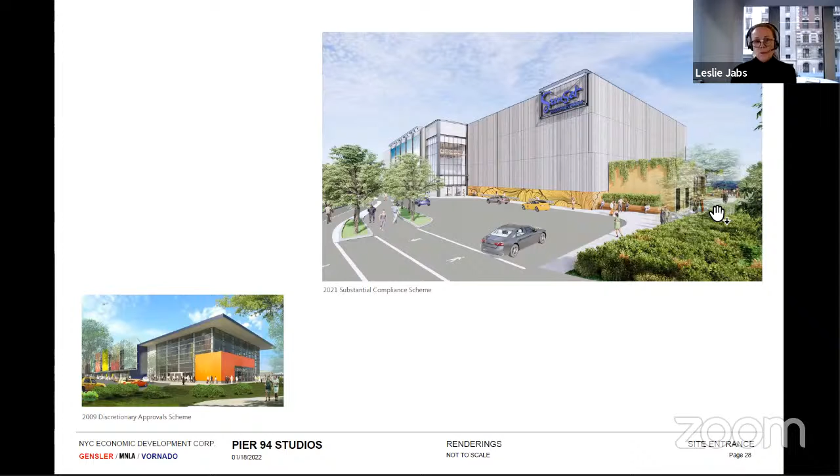Here, we're really looking to put something that celebrates the park and the idea of what it would be. Now, this view—if you think of that photograph I paused on earlier in the presentation and what the current conditions are—this extension of this Esplanade, the wonderful public space here with an added trellis. This is at human scale. This really works well for the public. It's welcoming, it's their space.

Here's their flex room, a nice large room. Again, same glazing that it's always had. There's not any big change here, but this is a much better environment and a much more welcoming environment for the public. Again, here, when you look at this, okay, this was that public space.

This really was the exhibition hall and the pre-function. How much the public would have really been using that space is questionable.

I do know there's been questions about the glazing. As we explained, this is a sound stage, and a sound stage cannot have glass. It's something between vibration and noise—you think about it, we have helicopters, West Side Highway, cruise ships hitting their horns, heralding people. The amount of acoustical environmental noise around this facility is substantial, and the requirements for those sound stages is quite rigorous.

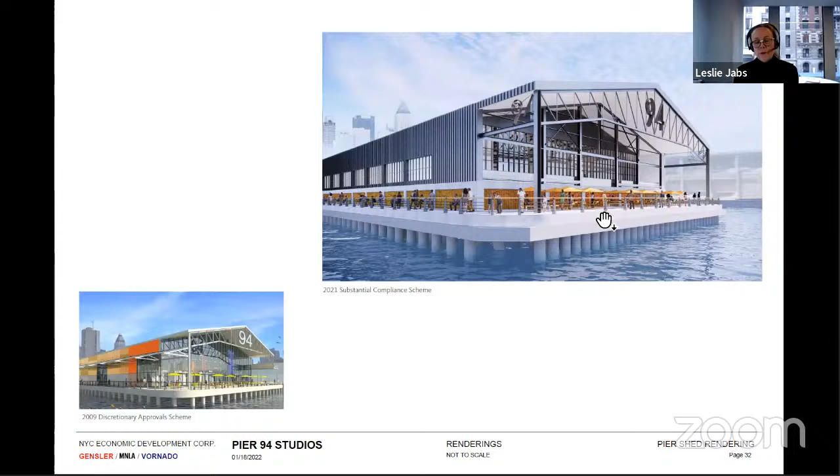Again, here was the previous version. The exhibition hall had more glass than we're able to provide now, because of course for that kind of business, you can only have so much glass into it.

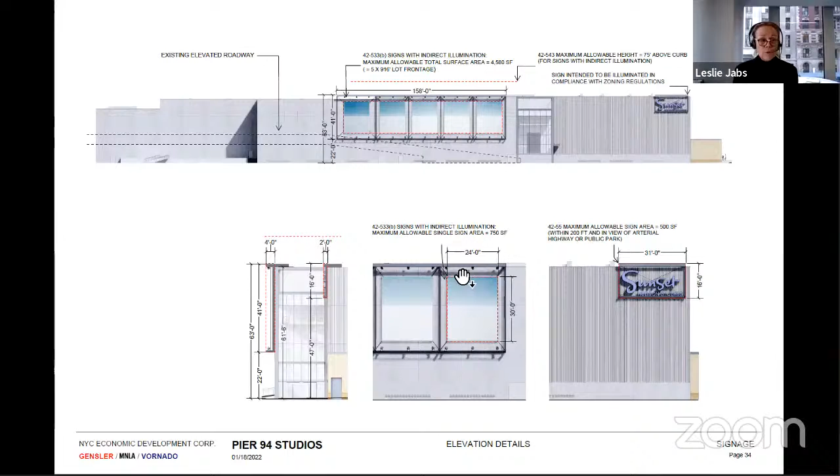So here's some detail—we won't go through this today. I think that would come at a subsequent meeting with you to really go through more details on the signage. I think this is here mostly to show you the references. These are very similar to what was shown and approved back in 2009, where it was exhibitions being proposed, similar to what museums do.

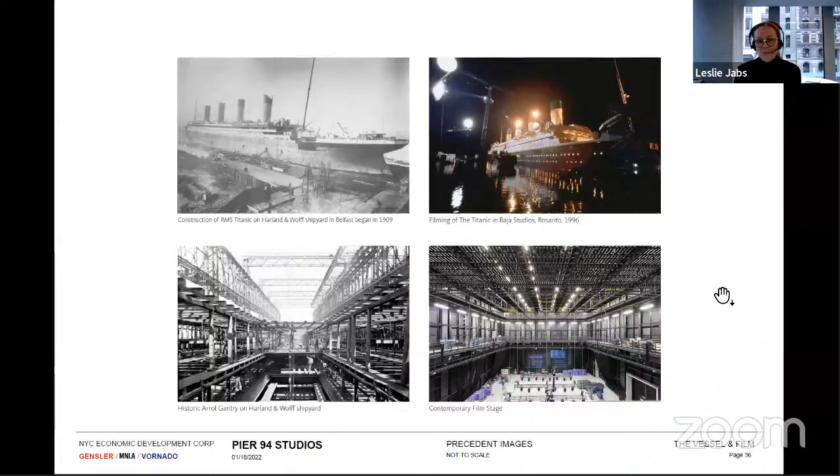I think here—well, I know we're out of time here, I want to be mindful of that. This is just reference imagery and some of the things we used as we thought about the history of waterfront architecture, the motifs, the things that are resonant for them—gantries, things like that—that actually the sound stages, the inside of this will actually look very much like what we used to have here. So again, this is just showing us within the range of what we have.

Materials—I think we've got some initial selections, as we've talked about. We're looking to use precast concrete for the bulk of the head house. For the pier shed, it will be metal standing seam siding, very similar to what is there today. And then for the community public space, we wished to use wood or wood appearance, as we would think of it. There's still work we're doing in terms of the tones, the final textures, that again we would come back to you at a subsequent submission to share with you. Daniel has gone through the paving and that, so I think this gives you a pretty good feel for what we're doing, and I'll turn the time back to you.

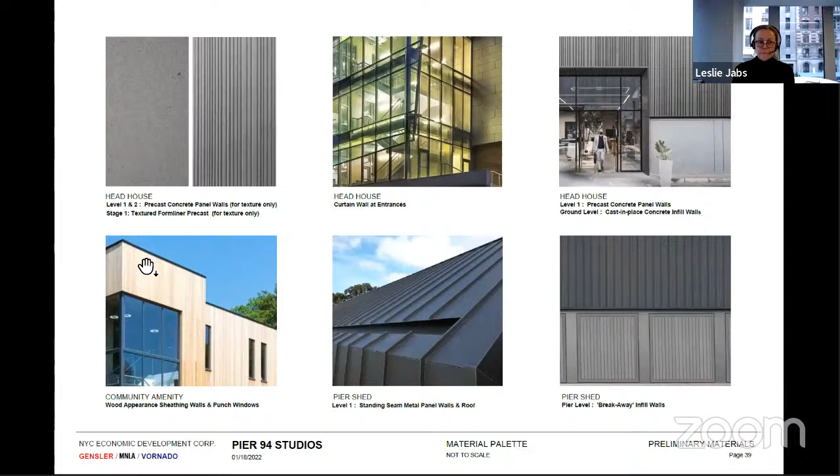Lori, yeah, I did. Can you start? Oh, go ahead. Okay, so I had several questions, and I guess the first one would not necessarily be directed to the architects or designers. It would be to the EDC, or maybe an agency that's not here.

I lament the program use shift here on such a public location. I understand we want jobs, I'm very sympathetic with that, but I just lament the fact that now we have a program use that has no visibility from the west side whatsoever. I thought the building was quite handsome before, and the fact that you could look into something, even if you couldn't go in, you could see activity, just like you do on a street in the city where you look in. So that's my first comment.

And then secondly, it's not a museum and it's not an exhibition hall, so they're not programs that the public can actually enter. I know there's a desire to decorate or alleviate that extreme condition of the west wall, but I think it's hard to justify showing the one-sheets from the films, because they're not exhibitions where people are going to participate. So if there's an idea, I would hope the designers could actually show us what you're thinking, what's going to go on there, what scale these things are. I guess they're like billboards for films that you see as you go up and down the highway.

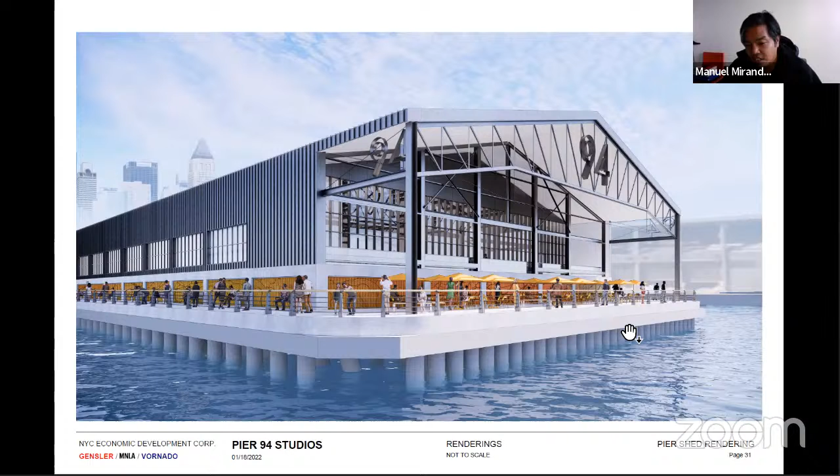I also had a comment about the signage, and I know we'll get to this later, so I don't want to take too much time. But I'm just curious about the framing of the signs.

I know that was approved already, but the framing of this operator kind of brands the space as their own. On the other side it says 94, which is in keeping with the nomenclature of all the piers on the site. So there's a bit of confusion where the front, more public-facing or city-facing side, is branded as the operator's space, and the back says Pier 94. I think that's something that could be studied—bringing the pier numbering language to the city side as well.

This is in fact the brand logo of the studio operator, Sunset Studios, so that's what that sign is for. There are a fair amount of signage limitations as of right under zoning—we cannot put signage on the north side, and there are limitations for where and how we can place it here. But there's no question that can be further studied to bring some of the Pier 94 identity in. No one is against having Pier 94 on the building, so we'll take that comment under consideration and review it.

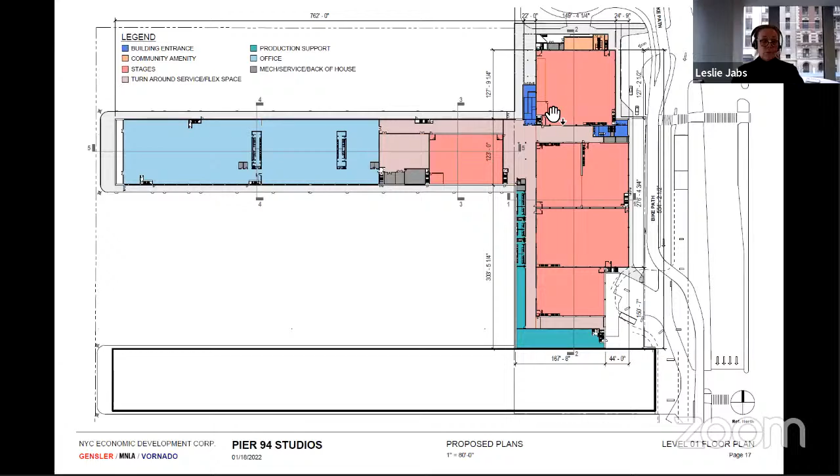In terms of how that ticketing works to get in, as you know, typically people do have to apply in advance. There will be security, obviously, people would have to go through. It can't just be fully open. However, it is an opportunity that's an equal opportunity for anyone.